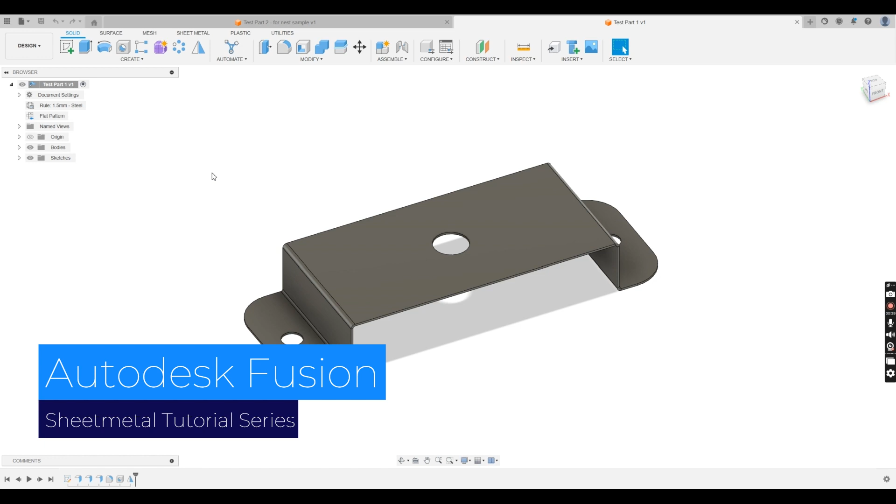In this video we're going to show you how to go from having a modeled part like this to a finished drawing that we can take onto the workshop for the staff that might be folding this part at a press brake, or they might just need it for reference for a customer or whatever.

So basically, if we've got a part like this, all we have to do is come into our button over here where we drop down our menu, we go down to drawing, we go from design, and then we simply want to select automatic here, and I want to do this in A4 size, and everything else looks okay to me. I'm going to hit OK.

Fusion in the background now is going to actually generate a drawing automatically. You can also do it manually, but I'm going to show you the automatic way first, because 9 times out of 10 parts can be done automatically, and you just add a couple of extra dimensions and you're set. So you leave Fusion work away in the background, and when it's finished it will have another pop-up.

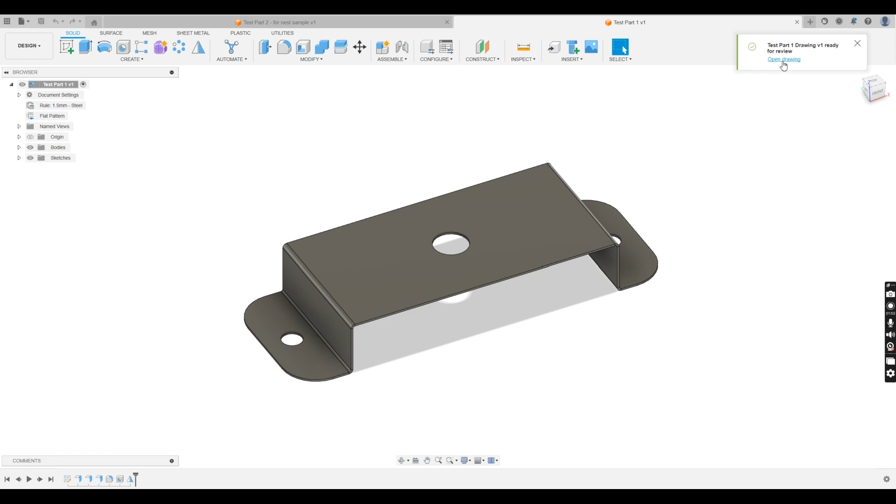So this pop-up here comes up. We want to open drawing. And Fusion has created this drawing for us fully automatically. So it's got all the what it thinks are the critical dimensions added.

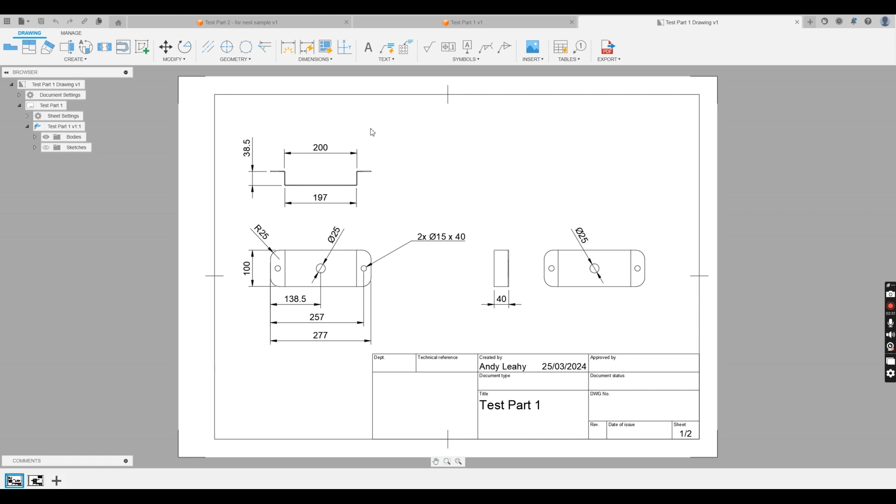So basically, looking at this part, I can see that it didn't include any angles of the part. So what I want to do is add some angles to the part, and I also want to take away some dimensions that Fusion added, maybe because there's too much detail on a specific area of the part. So for example, what I want to do here is zoom into the part, and I want to add a 90-degree dimension on this section here.

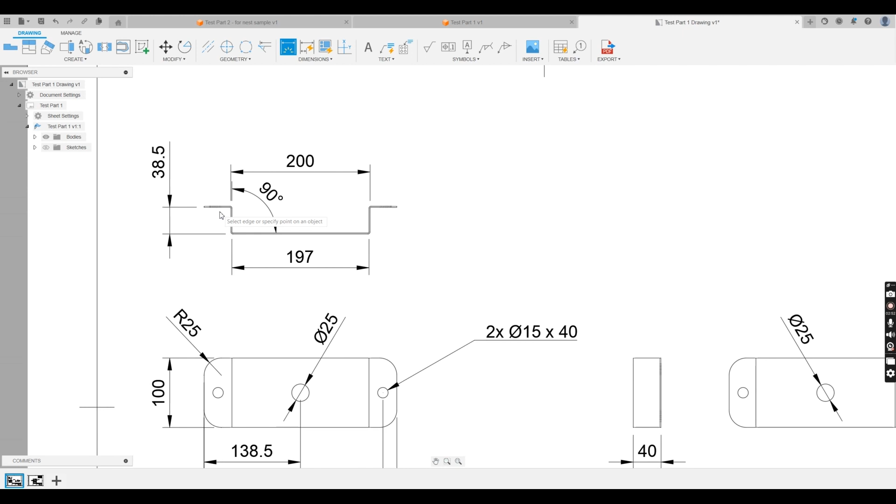So how I do that is I come up here to dimension, I select a line, I select another line, and you can see very simply that 90 degree angular annotation is added. So that's that. You can also do that on any of the angles.

That's simple enough. Basically then, let's just say, for example, if we wanted to take this dimension out, we just select dimension, hit delete on the keyboard. We can hit this dimension, hit delete on the keyboard, and so on and so forth.

You can also add in dimensions, so like dimension, you can go from, for example, from hole to hole center. We can go from hole center to hole center here.

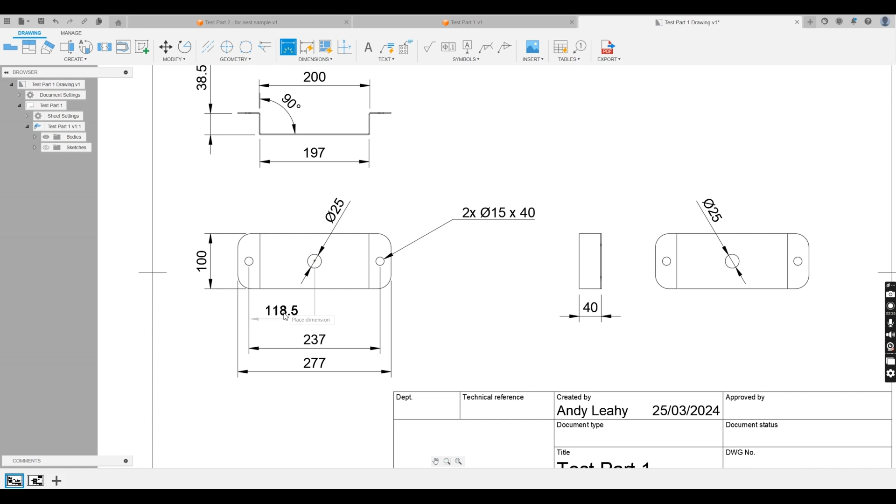So we can also add tolerance dimensions. To do this, we just simply go back into dimension. Let's say we want a tolerance on the center of this hole to the center of this hole.

Basically add your dimension. Then we want to double click on the dimension, click tolerances. I want to use a deviation, and we want an upper limit of 0.5 and a lower limit of 0, and we can hit close, and you can see that the tolerance has been added to that. So that comes in handy.

So that's just a real basic overview of how you can produce drawings. Also to note here, you can add, for example, text notes in whatever area you want. You can do a huge variety of things, but for this purpose I'm just going to keep it simple.

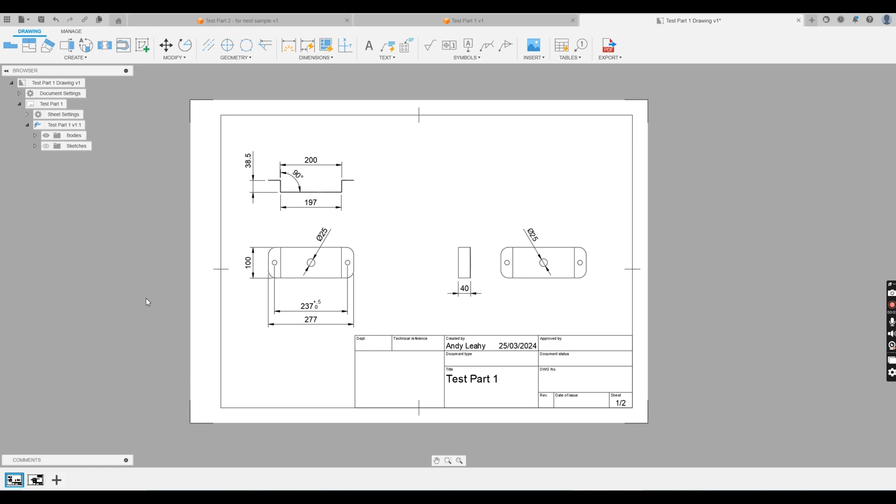Also, another thing that can come in handy is tables. So Fusion has also created multiple sheets for this part to be dimensioned properly. You can see that it's got this first sheet, but if you look on the bottom left, there's another sheet here as well. So if I click this second sheet, you can see that this has got more detail in relation to the bending.

And like that, if we want to export these two sheets, simply just hit export up here, and we can select all our sheets or selected sheets, hit OK, and that file will be exported to a PDF. Simple as that.